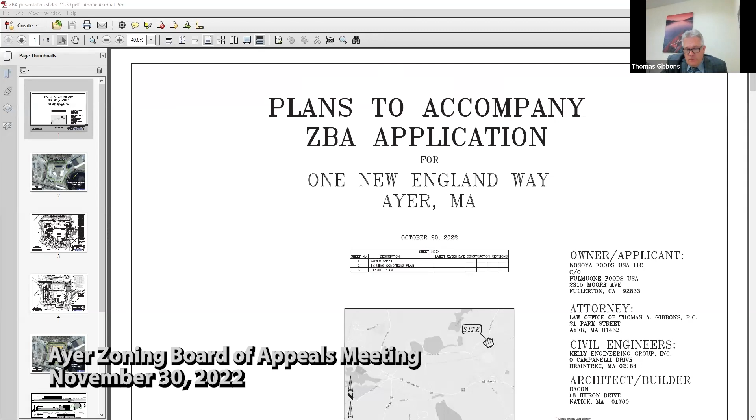So as you know, my name is Tom Gibbons and I represent Nasoya Foods USA LLC. We're before you tonight to discuss a planned expansion of the Nasoya Foods facility at 1 New England Way in Ayer. With me tonight are Brian Kim, Corporate Director of Engineering at Nasoya Foods; Justin Lee, Nasoya Foods Plant Manager; Jeff Prince, Senior Project Planner at Dacon Design; Dexter Preston, Project Architect at Dacon Design; and David Mackwell of Kelly Engineering Group.

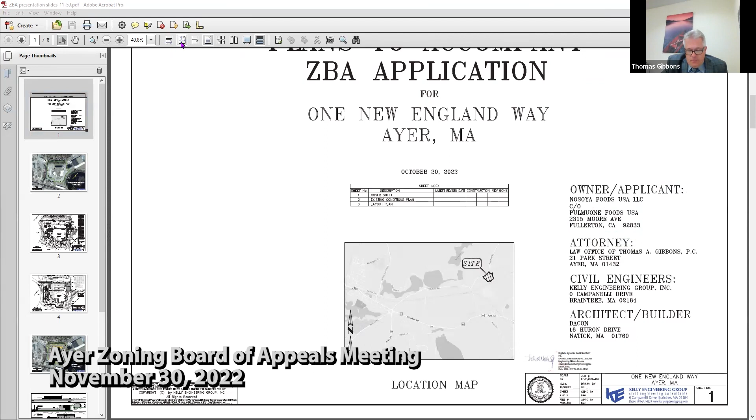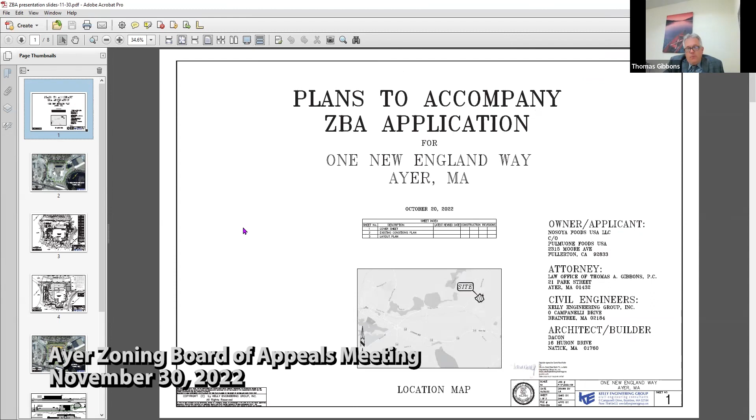Mr. Chairman, last month we simply opened the meeting and continued right away because of your absence, we wanted you to be at the meeting. Thank you. So a portion of the expansion includes a new cooling room. The cooling room portion is proposed to be 75 feet high, and therefore we're seeking a variance from section 6.2 of the Ayer bylaw, which allows a maximum height of 40 feet.

David Mackwell will provide you with an overview of the plans. But before that, I'd like to give you a historical rundown of all the prior variances granted for this property. Isn't this project a continuation of the one from 2 years ago? Well, not quite. There was a variance granted in 2020, but that expansion was never built. Okay, and I'll go into why.

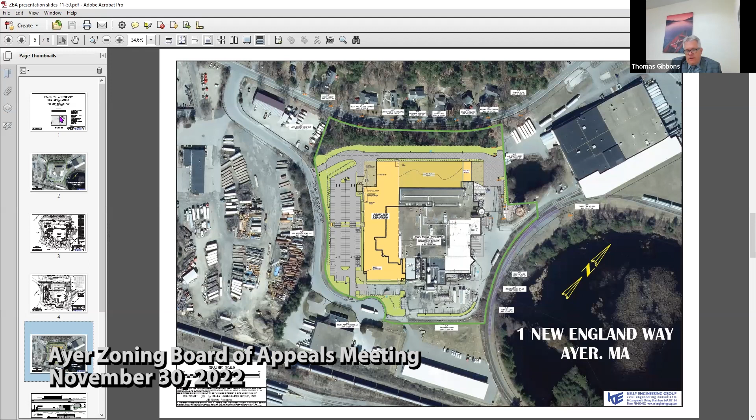I know this board is familiar with Nasoya's facility because this board granted variances in 2018 and in 2020, and the board makeup is the same today as it was in 2018. As far back as 1986, this facility had a freezer cooling room component. In 1986, the property was owned by New England Shrimp Company, and in April of 1986, the ZBA granted a variance for the construction of a 56-foot high freezer room.

In 1987, New England Shrimp Company was granted a variance to construct a water pretreatment facility to a height of 45 feet. In 1996, Nasoya Foods purchased the facility and was granted a variance to allow the freezer portion of the building to be a maximum height of 60 feet.

Then in 1997, Nasoya Foods was granted a variance for the construction of storage silos to a maximum height of 53 feet. In 2001, the ZBA granted Nasoya Foods a variance to construct 3 storage tanks in 1 silo to a height of 57 feet.

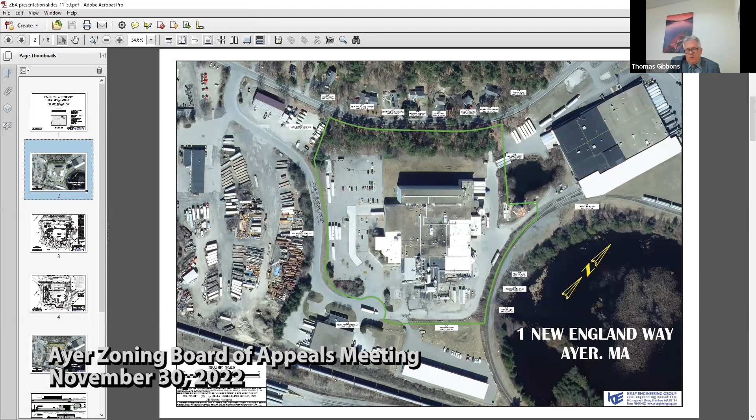In 2018, the ZBA granted a variance to Nasoya Foods to construct an 80-foot high stack, which was part of the regenerative thermal oxidizer being constructed at the site. You'll remember that variance because, again, the board makeup was the same. Finally, in 2020, you granted a variance to Nasoya to construct an addition to a height of 59 feet. The 2020 addition would have included a second phase, which would have brought Nasoya back to you for a height variance on the second phase.

That addition, however, was not constructed because shortly thereafter it was granted, Nasoya realized that the addition would not have satisfied its needs based on the growth it was seeing and the opportunity to incorporate new and improved techniques into the freezer cooler room.

Some facts you might not be aware of about the Nasoya Foods facility here in Ayer: it is the second largest producer of tofu in the United States. With the expansion, it will likely become the largest producer in the United States. The facility employs between 130 and 150 people, and with the expansion, the expectation is that after a short period of time, 35 to 50 more employees will be needed.

Going back as far as 1986, you can see that this type of production requires a portion of the facility, particularly the cooling facility, to exceed the height limitations in our bylaw. I'm going to ask David Mackwell to take you through the overview of the proposed expansion, and then we'll take questions, and I'll run through some of the elements of the variance. So David, if you could take over and give us a rundown of the proposal.

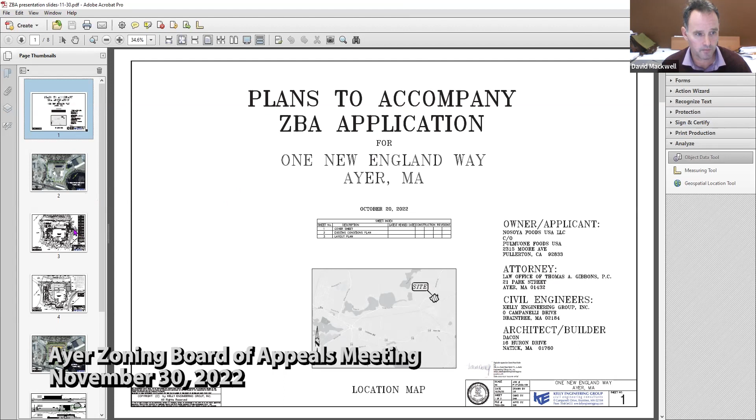Today we have a presentation that enhances those 3 sheets with some colors and aerial photos to help describe the project. They're really just colored versions of the same thing, and we emailed them over to the staff for open meeting law. So this is just the cover sheet that we filed, and then the next thing we filed is an existing conditions plan.

You can see there's a lot of food processing equipment on the rooftops and around the site. There's car parking on this side, approximately 159 car parking spaces. Currently there's loading on this side here, all along this side, and some loading in the front.

The proposal is to enhance both the food processing manufacturing space and also the freezer space. We've put together a plan that's in black and white in your zoning packages, with a lot of hatching and things on it, so we've created a colored version to help demonstrate some of those things. When we were laying out the site and trying to come up with how we could get the volume of cold storage...

We can actually see here, this is the neighbor's recently reconstructed building, I think it's Catania Oils over here. That's the outline of their building. It doesn't show quite yet on the aerial photos because it was just built in the past year or couple of years.

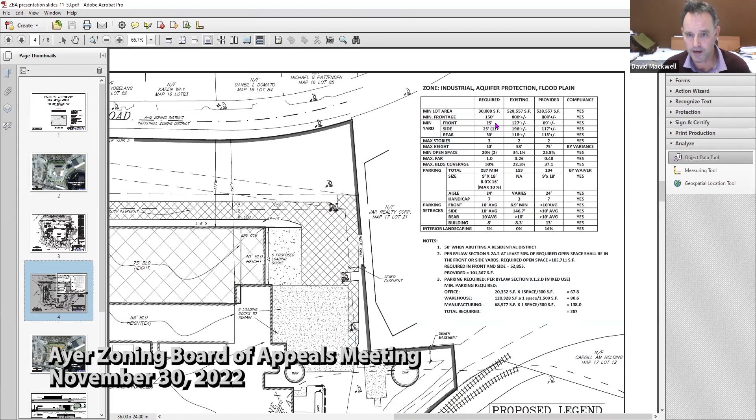You'll see that the required setbacks along all of the sides are only 25 and 30 feet, and the proposed conditions well exceed those, the biggest one being 117 feet from the Westford Road property line.

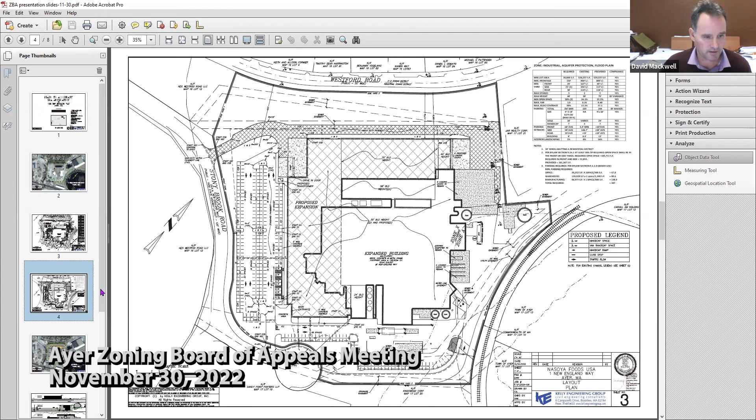Elevations were discussed a little bit in Tom's presentation, and since we're asking for a height variance, we thought it was important to show what's going on at this site and in the area.

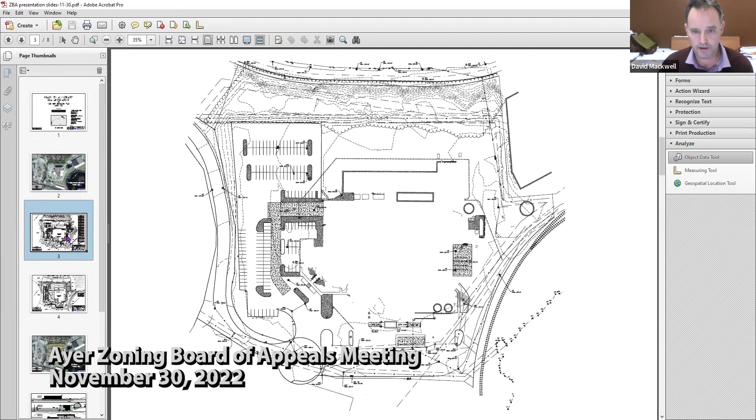As part of the filed documents, we filed a topographic existing conditions plan with a lot of lines, but we'll put it in plain terms of elevations. The elevation of Westford Road is about 255. The finished floor of the building is at about 226, so quite below. Most of the areas around the building are about 4 feet lower because we have a lot of loading, at elevation 222.

Down in the wetlands on the other side of the tracks, the grade goes down as low as 215 or 217 or so. We felt that was important as we reconfigure the site, because even though we're going up here, it's not a tall building from Westford Road. It's a taller building from down here, but really from what the public would see, it's not that tall.

Dacon did a really nice job. I'm going to switch to a slide that wasn't provided within the zoning board package - this is merely a colored version of that layout and zoning plan, where they cut some real sections from the detailed survey and the tree lines.

I think the two that are most telling, I'll circle them here. This is if you're driving on Westford Road heading east, and the building would be on your left. I'll zoom in so we can see some of the elevations at Westford Road. It's down here - Westford Road is about 31 feet above the site, and then we'd be going about 40 feet above that.

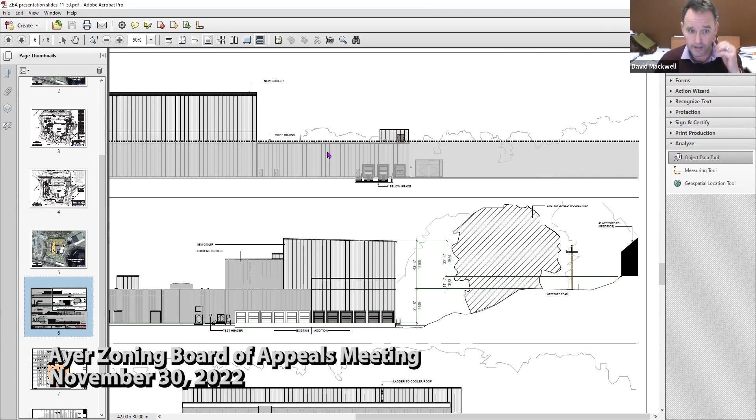From the garage of the house, we'd be about 32 feet higher than the driveway of that home. I think that really tells the story that 75 feet sounds like a lot, but from what the public will see driving on Westford Road or living over there, it's not going to tower over everything. So we felt some of these elevations were very important. Some of the silos are shown here in scale as well, along with some building elevations of what it would look like.

If you're looking straight at the building from Westford Road, this is what you would see. But you really won't see that because you'd be looking down into it and through the woods, so you really can't see it on this elevation.

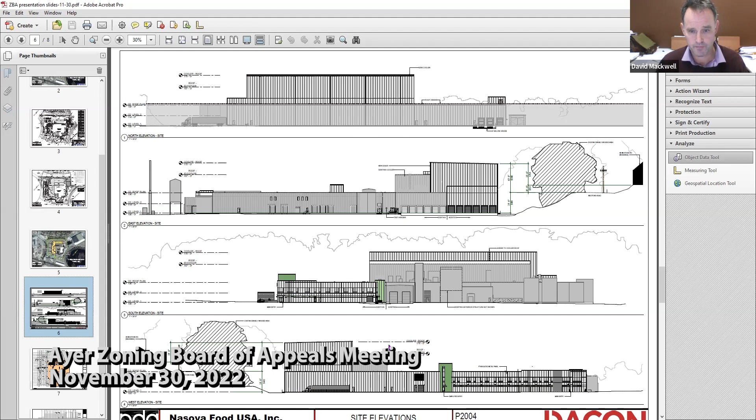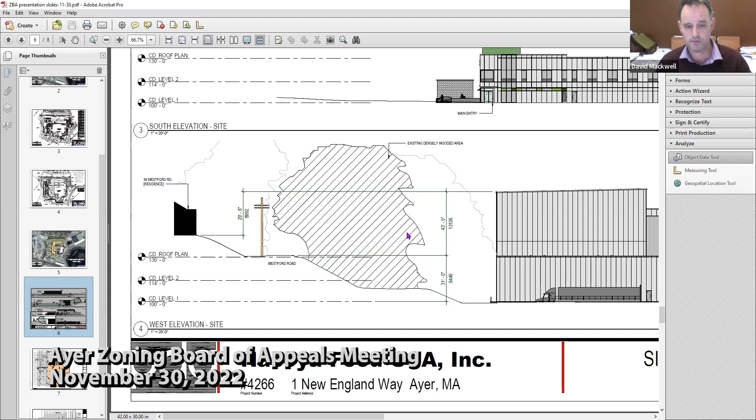This is the front elevation, showing the new office and manufacturing area. This is just the same section as above, but coming from the other direction at Westford Road. Similarly, from 36 Westford Road, we feel we'll be about 29.5 feet above the driveways at that location, and about 43 feet above Westford Road there.

The only other thing we prepared, or Dacon prepared, is some basic elevations of the building. I know we're not getting into design review here, but we want to show the massing of the building and how it was designed, so we've made some simple exhibits to show these elevations.

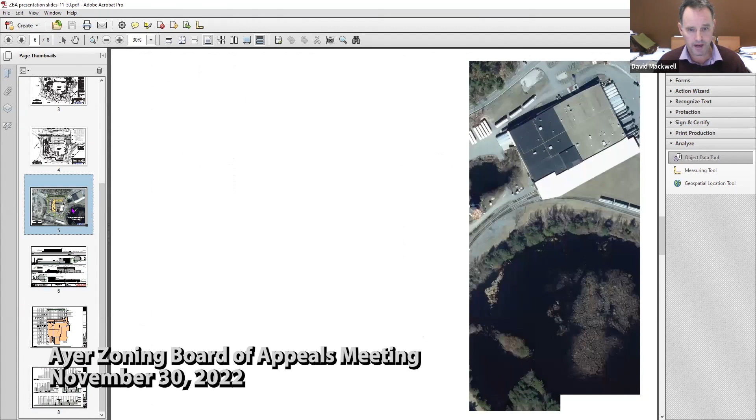So, circling back, we have a fairly significant redevelopment project for the food manufacturing business that provides a lot of jobs and is a big employer in town. With this expansion, they'll be able to provide additional jobs. Although we're asking for a waiver for a parking reduction, we're still going to be providing about 40 more parking stalls than exist today—just better organized on this side of the building rather than spread out. As for other permitting, as I mentioned, we're fully within the industrial zoning district and also in the aquifer protection overlay district.

So we'll be going to the planning board for site plan approval and a stormwater management permit, and we'll probably make a quick stop at the Conservation Commission. A very small portion of our site is in the wetlands buffer zone—the 100-foot buffer zone there. But really all we're doing is taking out some pavement and putting in a green strip and some landscaping in those areas.

So we've been working on our next phase of the project, which will be the planning board filing. This will include traffic studies, stormwater management reports, detailed floor plans and elevations—all the things pertinent to that site plan review and the applicable findings for the special permit.

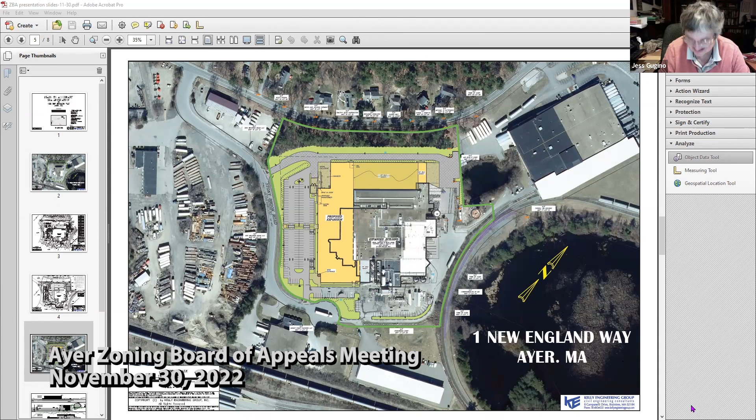We haven't gotten there yet. Yes, we did address access to the roof from the other cooler roof. There'll be a ladder on the elevation plans, David, I think we can see the ladders that the chief had asked about. So this section right here, there is a ladder to get to the third section.

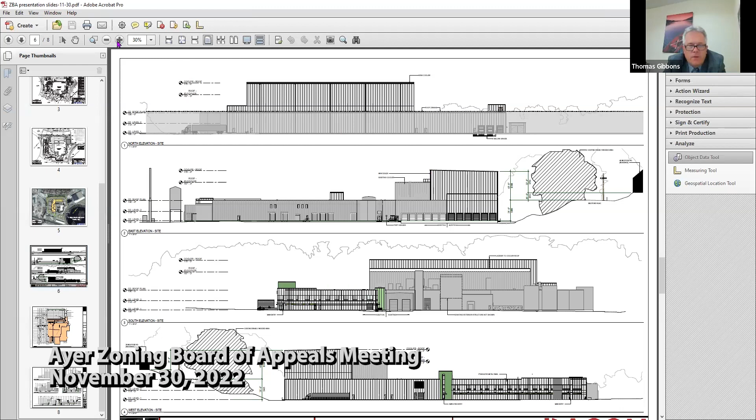Yes, the second plan, right there, there's a ladder right on the existing cooler. That goes to the existing cooler roof, and then there's a ladder from that roof onto the tall roof, the new cooler roof. You can see that ladder on the next screen down that takes you to the roof of the new cooling facility. There's one an existing ladder there, and then there's a new ladder to the cooler roof.

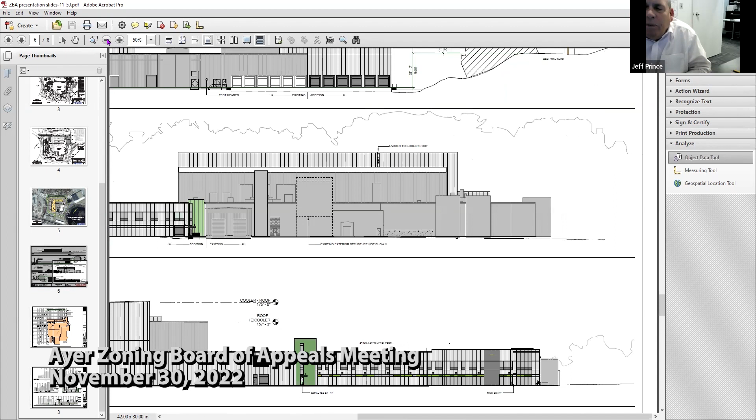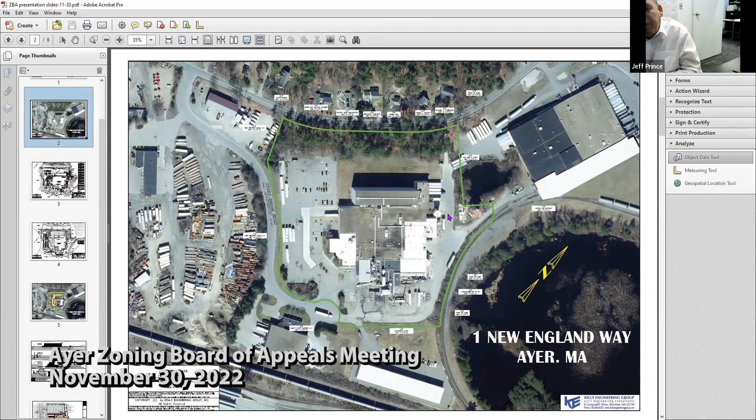If I could add a comment, fire department access is much improved because we have a circulation road that goes around the building, which is very much in compliance with the modern standard for an unlimited area building, and will allow access right up to the tallest portion of the building for firefighting purposes in any methodology they'd like to do. I think it's a very significant improvement over the current situation.

Fair enough. Thank you. Did you see the comments from the DPW? They had a couple comments. We read all the comments and we're prepared to respond to them. If you might repeat them, we'd be happy to.

All right, the DPW is concerned about the encroachment on the sewer easement. The actual sewer force main location needs to be determined by the applicant. I'm assuming you did that. We have done underground radar survey to locate all the utilities within the building footprint. The force main location is generally known, but not specifically located in all cases. We're going to have to do excavations to verify its location, but we're prepared to relocate the force main if we encounter it.

So the DPW is concerned about the encroachment on the sewer easement. So apparently you're saying that's not the case? No, there is an existing easement and we expect the pipe to be able to stay within that easement. There are probably some areas where they didn't put it in the easement, and we would put it back in the easement. Fair enough. Thank you, David.

The second comment was they questioned the additional sewer flows and loading above Nasoya's approved limits. Nasoya has a permit with the town for 208,000 gallons per day. They're currently discharging about 170,000 gallons per day, and they expect with this production ramp up that they will ramp up to the capacity of the system at 208,000. Once they reach that limit, Nasoya is aware there are other improvements they will do to the pre-treatment systems before it goes to the waste system. There is a memorandum of understanding ready to be executed between Nasoya and the town of Ayer.

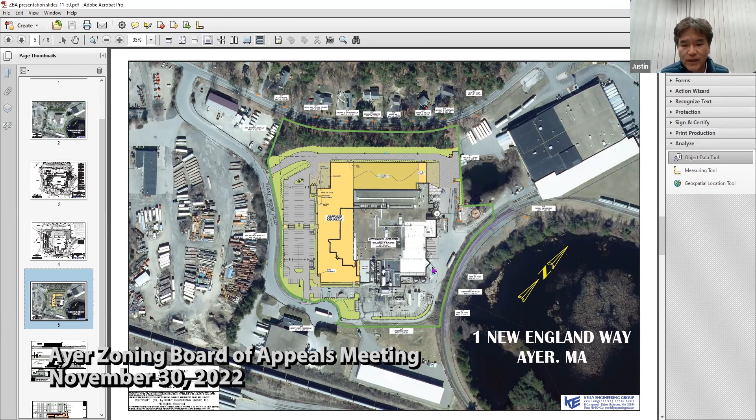Have you paid your taxes? Not that I'm aware of, no, but I do have concerns. That's a legitimate one for me. Yes, at the last meeting the taxes were paid except for a small amount, and I think by now that's probably been cleared up. Is that correct, Justin? Yes, I'll double check with our accounting team, but that has been addressed. I think we short paid 1,700 some odd dollars, but there was an issue with it, and I believe they're paid up. Okay, yeah, that makes a difference to me.

Mr. Chairman, we did look through the department head comments, and I would just note that the DPW said that they didn't have an issue with the height. Certainly those other issues, we have answers, and as you know, we'll be going to the planning board if this variance is granted, so there'll be more time to deal with those. But we will comply with whatever's necessary for the DPW.

Again, the point being that they didn't have a problem with the height. The one department that would be most concerned with the height would be the fire department, and as we've said, we've answered his issues with making sure that there's full access to all the roofs on the building.

Has Alan Minoyan reached out? Oh, I'm sorry, so I saw his note. Worth noting that the new addition will also be adding a full stair that goes to the new roof. Currently access to the roof is via an exterior stair on the existing building, or through a roof hatch, so we'll now have a natural stairwell that goes to the roof.

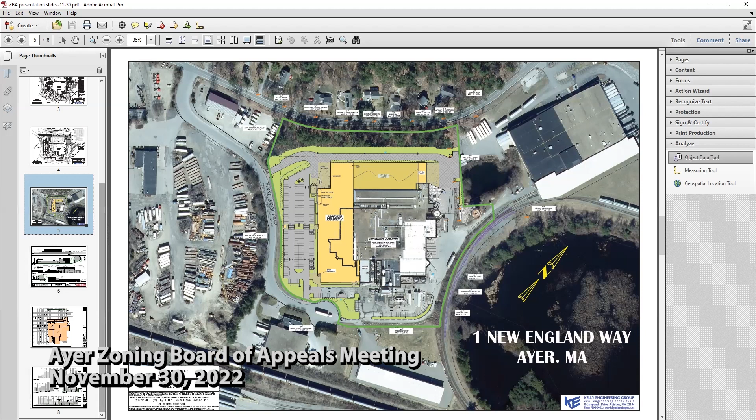So Alan has not reached out to me, and his comment was he wanted to see building elevations. Those elevations we submitted after I saw that comment. Dexter, is there another plan that shows something a little bit different that gives a bird's eye view that we were talking about? If not, that's fine. But I would say that his comment was the elevations, and we've given some elevation plans.

He mentioned a balloon test. I suggested a balloon test wouldn't really be necessary. This board in 2018 granted the variance for the stack that's 80 feet tall, so if you're down there you can see that stack. It's better than a balloon, and that's at 80 feet. That's what I've used as reference here, just so the other board members know. I was using that as my real sort of measuring stick to figure out where we were going to be.

If Alan did want to come down and do some kind of balloon test, unless you're opposed to it, just let him poke around. But I saw the elevations, and I think that addressed the major concern I had from his comment as well. Yeah, I think I agree with that, Mike, and we did pass along the elevation pictures to him, so he did see them. Thanks, Sam, fair enough.

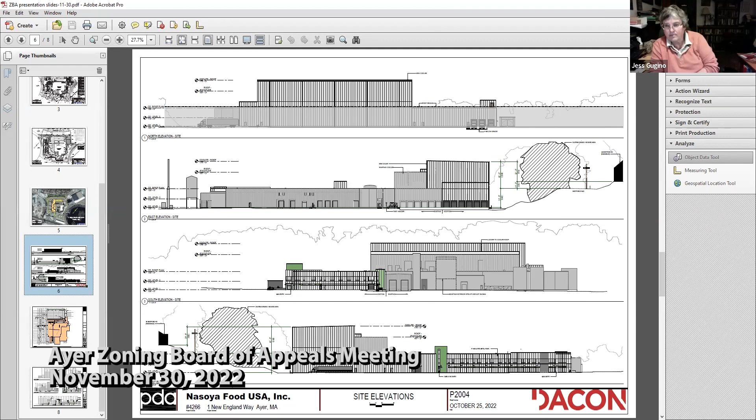I have no further questions. You guys do? Mike? I think I'm good, Sam. I'm good. Okay. Ron? No further questions. John? Yeah, you went through them all, I think everything's been addressed.

All right, I will entertain a motion. Before I make a motion, Sam, do we just want to check with public? Yes. Is there anybody? I can't see anybody. I'll make a request: if there are any members of the public on the Zoom call this evening that would like to make a comment on this application for variance at 1 New England Way in Ayer, please use the raise hand button, or frankly, just speak out.

Sarah Withy, Groton Shirley Road. Can you hear me? Yep. Are these pictures that we're looking at the elevations that you're talking about that were passed along to Mr. Manoin? They should be, yes. Okay, thank you. No problem. Thank you.

Are there any other comments? Is that it? That looks like it's it, Sam. All right, now if I can, I'm just going to wrap up a few points.

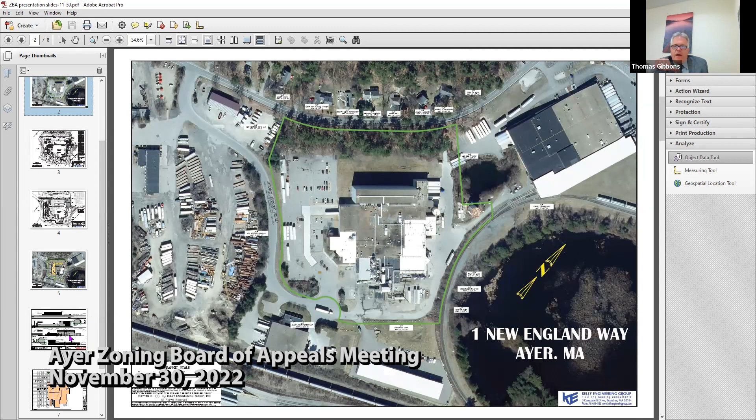The topography we've talked about is unique to our lot because the topography isn't the same going down the whole Westford Road in that district. I think historically it's clear that this type of facility requires height, particularly in the cooling structures, because the way these cooling rooms work is there's a rack system in there, and the cold air comes from the roof or ceiling down onto the product. So it's the most efficient way to do it.

With the relief, we lessen the footprint of the building. It's a more efficient use of the property. I think you can grant the relief without a detriment to the public good or substantially derogating from the bylaw because of the topography.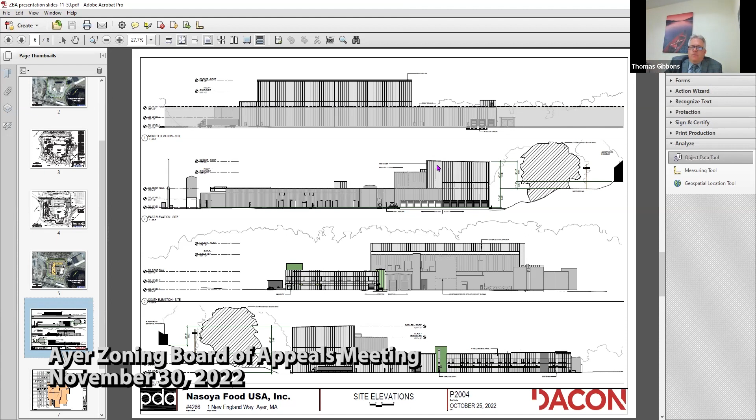So in reality, when you're on Westford Road looking at it, it's really very close to the height limitation as to what you see. And in addition to the topography, you've got some mature evergreens and deciduous trees there that again lessen the impact visually. Without the variance, there would be hardships to the applicant in the sense that it would be more expensive to construct, it would be much less efficient, and it would take up a larger footprint. So I do respectfully request that you grant the height variance as requested.

Thank you. All right, Mike, make your motion. I move to grant a variance pursuant to our zoning bylaws, section 6.2, to allow for the construction of a portion of a building to a height of 75 feet where 40 feet is allowed.

Second. All those in favor signify by saying aye. State your name. Jessica Gino, aye. Mike Gibbons, aye. John Ellis, aye. Philip, aye. Sam Goodwin, aye. You have your variance, gentlemen.

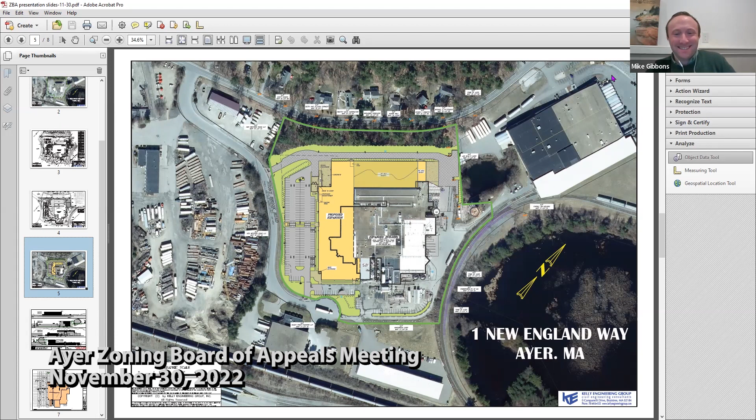Thank you very much, we greatly appreciate your time. Thank you, sir, thank you very much to the board. Thank you, thank you, good presentation. Thank you, everybody, have a great night, thank you for coming out in the rain. We're home, we're at home. We got it, you had to get up and get that cell phone. Now you have to get the heat going. Let them think we're under hardship, I wish we were. All right, thank you very much.

Thank you again, Mr. Chairman, and so the public hearing is closed, or will be closed.

It will be, yeah, as soon as we make a motion. So I make a motion we close the public hearing for the Nasoya Foods.

Second. All those in favor signify by saying aye. Jessica Gino, aye. Mike Gibbons, aye. John Ellis, aye. Philip, aye. Sam Goodwin, aye. Okay, then.

Thank you very much, everybody, have a great night. Nasoya Food, thank you, sir, yeah, thank you so much for your approval. Well, good night, bye-bye, all right everybody.

I think the next item is December 21st. Yeah, December 21st? It looks like it, 21st. Merry Christmas. Yeah, really, huh? What do we get for it, Christmas? All right, 40B, it's gonna be a long one.

It's gonna have a Christmas party in this one? I wish, yeah, there's gonna be a long one. We've had three applicants, plus the 40B, dear. Plus the 40B? Plus the 40B. Nice, yeah. All right, it's the most wonderful time of the year. All of us to be there for Christmas, yeah honestly, joy, joy, joy.